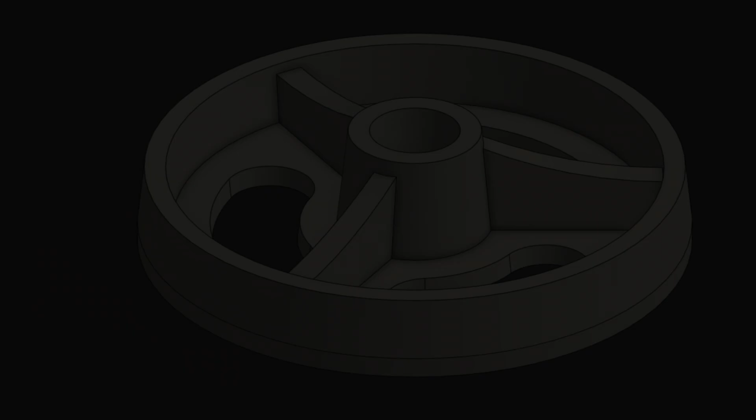Inside the Too Tall Toby practice model 250706, there is an interesting cosmetic problem where the rib merges with the rest of the body, creating a split surface. Let's see how this can be solved in Onshape.

Let's make the first sketch. Click on the right plane, then press Shift plus S for sketch and then N for normal to sketch plane. Press L and Q to draw a center line. Press Escape, then L for line. Draw a sketch for the revolving body, taking into account the clearly known dimensions.

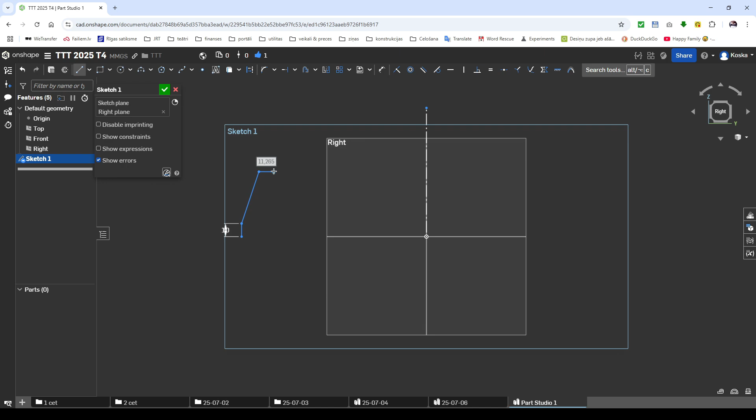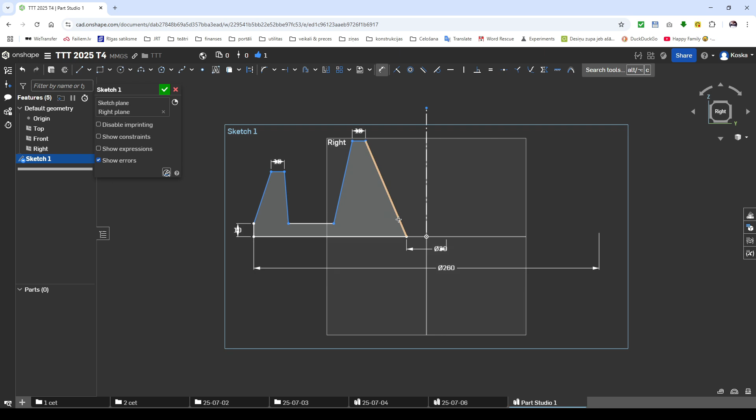Finish the drawing by closing the outline. Press D for the dimension tool. Set the remaining dimensions according to the sketch. Press B for the parallel constraint.

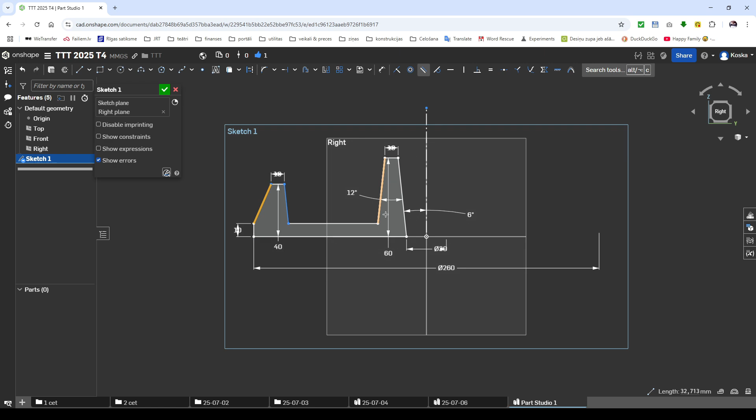Press S and select a 3-point arc. Draw the rib profile, set the dimensions.

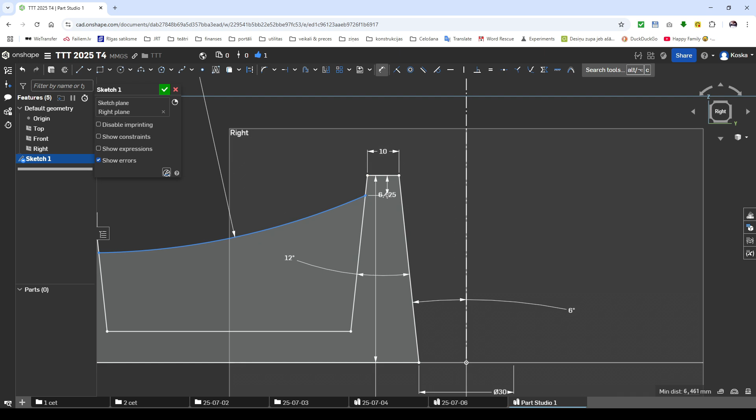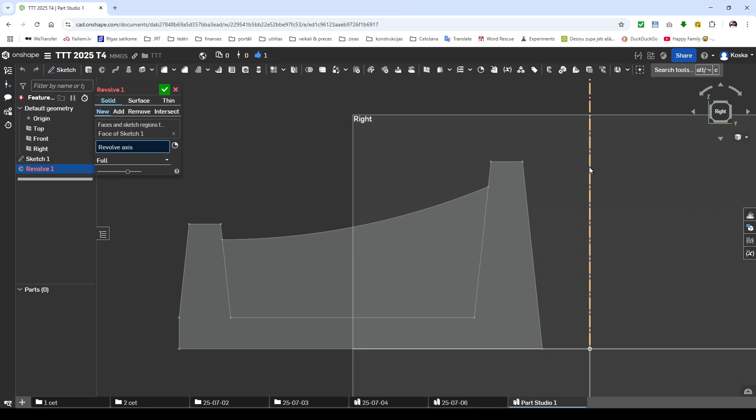Press Escape, click on Sketch Region and press Shift plus W for Revolve. Press Tab, then click on Centerline. Confirm Revolve. Click on Sketch 1 eyeball to make the sketch visible.

Select the rib profile line, then Rib tool. Select Parts box. Click on Revolved Body. Set the rib width 16 millimeters. Confirm. Zooming in shows two small surfaces that don't merge with the rest of the upper surface of the rib.

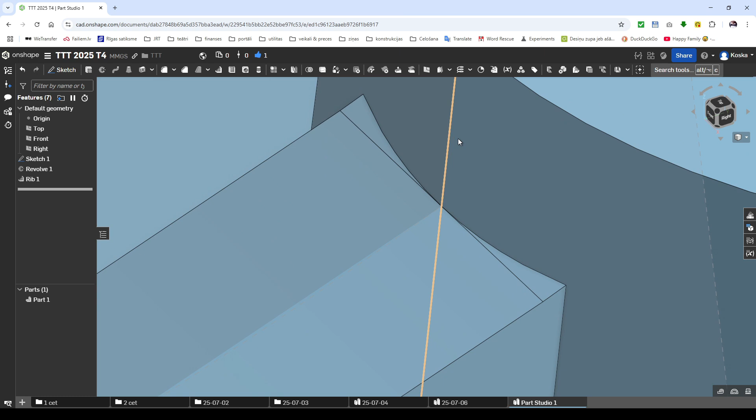There are several ways to get rid of them. Let's look at two of them. The first method is at the feature level, which Toby already showed on the live broadcast. Let's select the Delete Face command. Make sure that the heal option is checked. Select both unnecessary surfaces and confirm the Delete Face command.

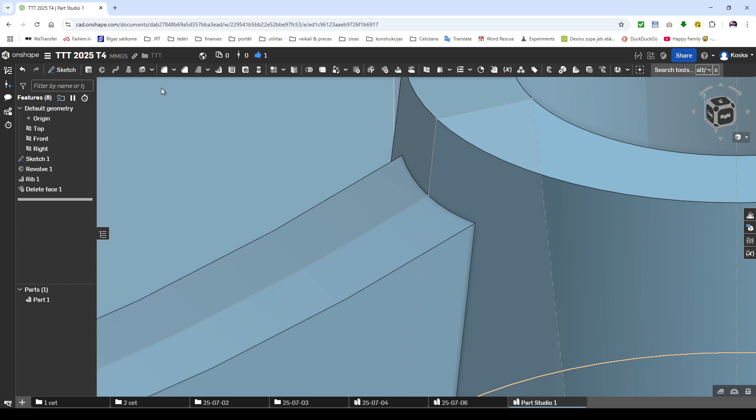The task is completed. The second option can be implemented much earlier at the sketch level. So let's return to it. With the rollback bar, we will leave only the first sketch active. Double-clicking on the sketch activates its editing mode. Let's zoom in to the desired region.

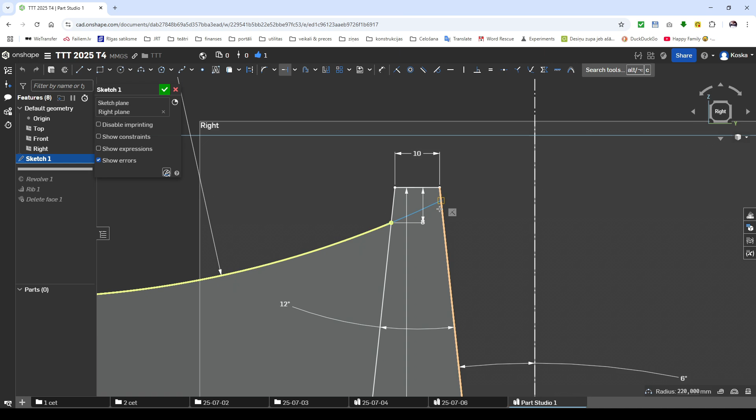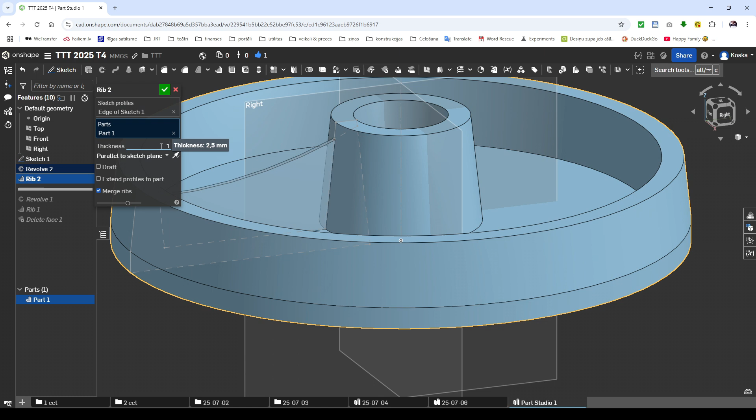To extend this rib profile line, select the Extend command, hotkey X, select the line to be extended, and then the line to which it should be extended. Confirm the sketch and select two sketch regions for revolving. Then repeat the revolve and rib commands performed previously. As you can see in the zoom, no extra surfaces are created.